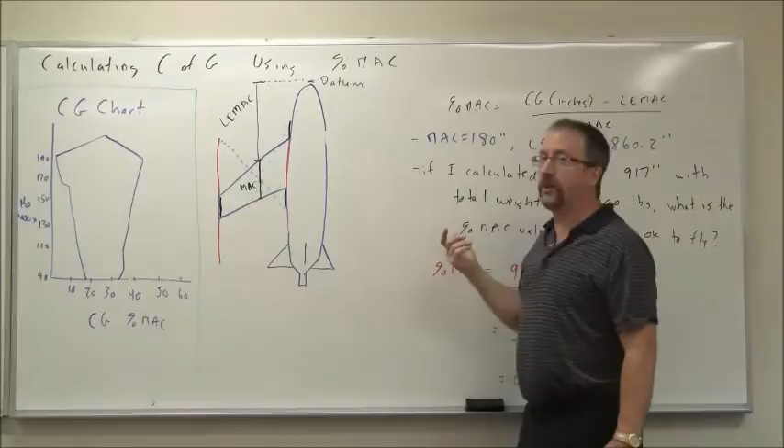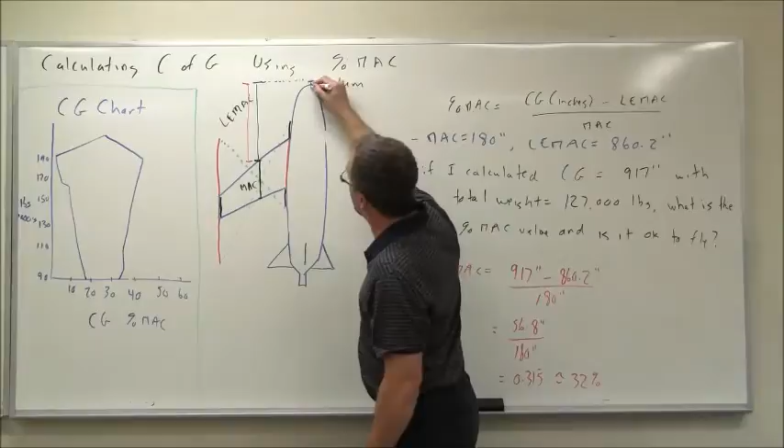What we need to do is find out what percentage of that MAC is reached with the center of gravity. So, calculation for that, percentage of the MAC: the center of gravity we calculated, measured in inches, minus this distance, leading edge MAC distance. So my CG, measured somewhere around here, I'm going to take the CG and subtract the leading edge MAC.

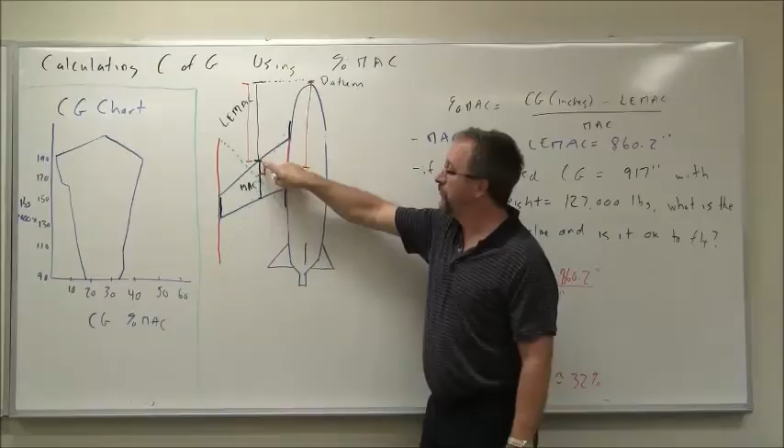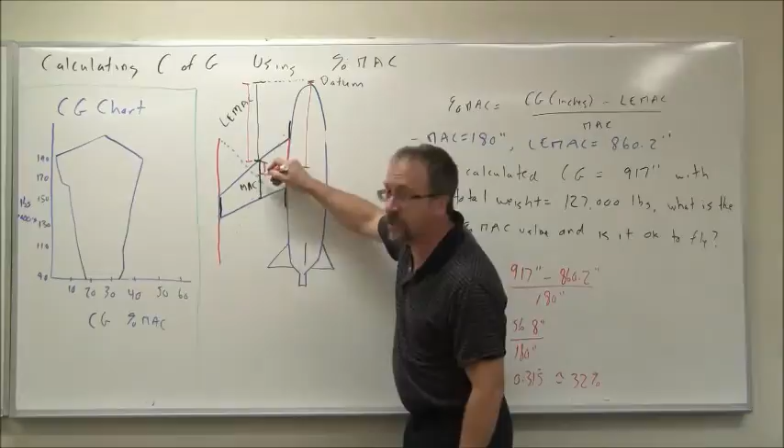What that means is, I'm really coming up with that distance, how far down the center of gravity goes along the MAC. And I'm sorry if those lines aren't quite parallel, it's freehand, but you get the idea. So my center of gravity came a certain distance past the leading edge of the MAC. I'm calculating that difference. That's what that top line is, CG in inches minus the LE MAC, divided by the MAC. So we're going to take this distance, divided by the total MAC distance. That'll give me what percentage this is of the total, hence percent MAC.

So let's look at an example. If I calculate the center of gravity of 917 inches, and the plane had a total weight of 127,000 pounds on board, that's the aircraft plus all cargo and flight engineer and pilot and all that, what is the percent MAC value, and is this plane okay to fly? There's two parts to that question. Well, first, let's get the percent MAC.

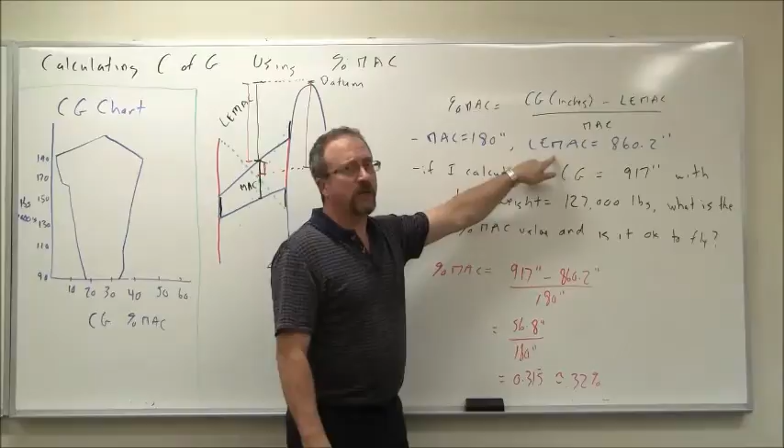My CG I calculated was 917 inches, subtracting 860.2 inches. For our plane, that's an approximation of the value. I don't have the manual, so I don't know the exact number, but that's the number that I found. It seems about right when I do some measuring. 860.2 inches is the leading edge distance to the MAC. The MAC is 180 inches. That's the distance from the front end, the leading edge, to the trailing edge of the wing at the MAC.

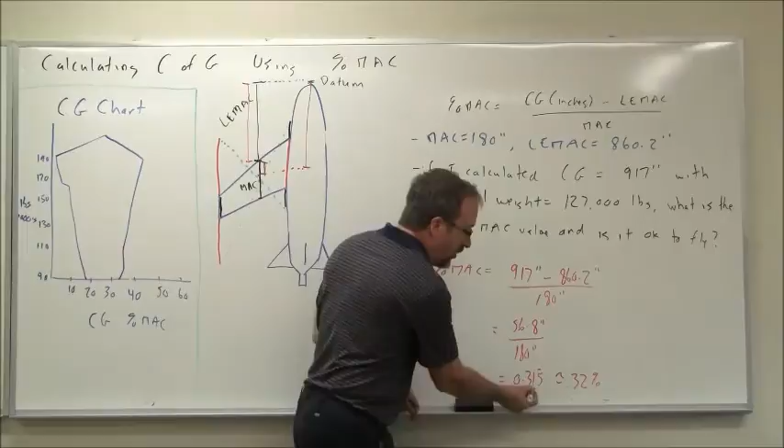So, 917 minus 860.2 will give me the difference between the leading edge MAC and the CG, so that'll tell me this distance, how far into the MAC it is, divided by the MAC distance. 56.8 inches divided by 180 inches gives me 0.315. As a percentage, remember this is a percentage, so 0.315 would be 31.5%. For our purposes for looking things up, that's roughly equal to 32%.

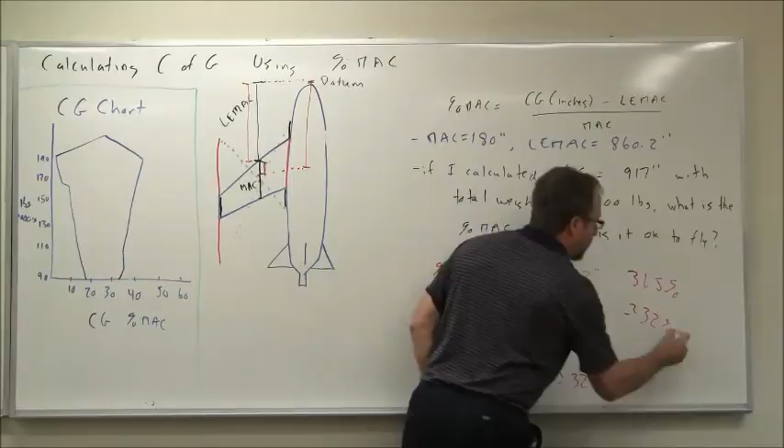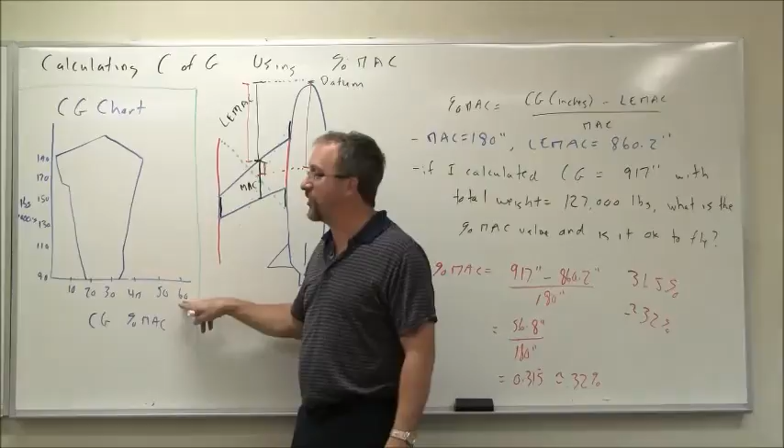So now the question was, is it okay to fly? I've got the percent MAC at 32%. Is this plane okay to fly? Well, I included a chart that looks kind of like this. I've, again, put a freehand drawing, but it kind of looks like this. The percent MAC value along the bottom, 10, 20, 30, 40, 50, 60%, and so on. And the weight in thousands of pounds, 90,000, 110,000, 130,000, 150,000, and so on.

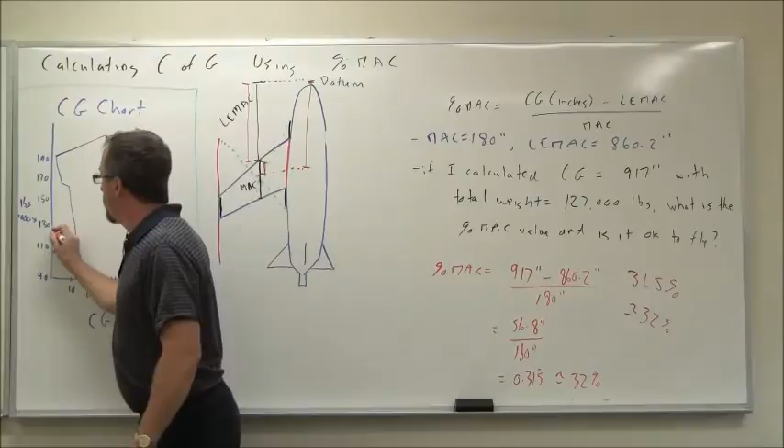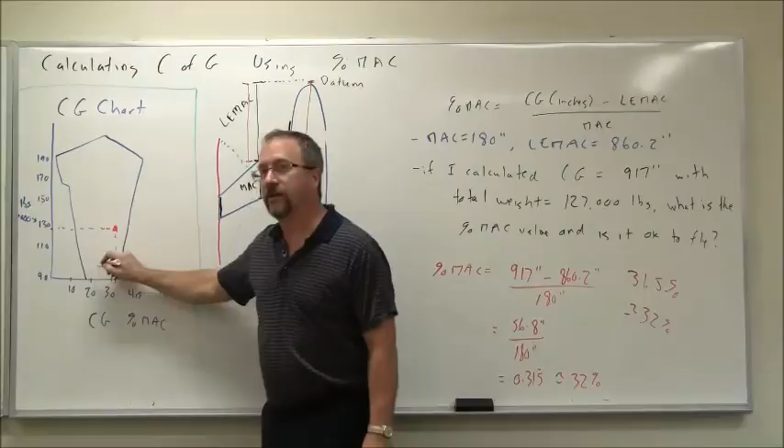So I cross-reference that. My percent MAC was 32, so that's roughly here. My weight, 127,000 pounds, roughly there. If I find the intersection point of those two, it's roughly here. That is inside of the chart. Because it's inside, that means the plane is okay to fly. If the intersection point fell outside of that diagram, then it would not be okay to fly. So in this case, 127,000 pounds, 32%, we're good to go.